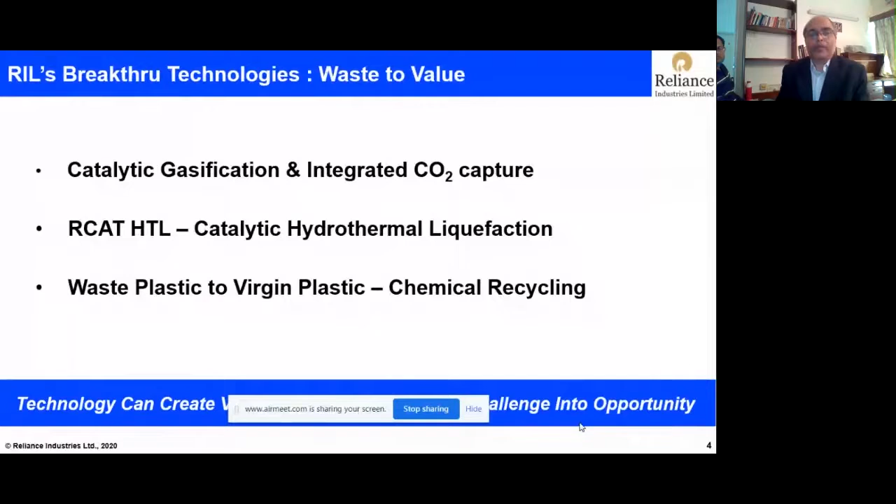Then we have a very breakthrough technology, RCAT HTL, hydrothermal liquefaction. It's basically for all kinds of biomass, but more focused on wet biomass. We also have a process for waste plastic to virgin plastic, chemical recycling. We expect it to get about 55 to 60% circularity.

When we talk of the energy sector, specific to India-centric innovation, we have to keep in mind that there are 4 circles which have overlap: availability, affordability, sustainability, and productivity. So the technology that we intend to develop encompasses all these circles.

So far, India was short in feedstock. We are importing a lot of oil and gas, which is a heavy burden on the economy. Fortunately, the world is moving towards a circular economy, and as you know, India is an agro-based country. A lot of agro biomass is available. India also has the high ash Indian coal reserves. There is also a lot of municipal solid waste, waste plastic, etc.

If we can convert this waste material into chemicals and energy, this would bring a lot of circularity and greenness to our energy sector. So that's the core thing that I am going to present to you, how our technology development would lead towards this.

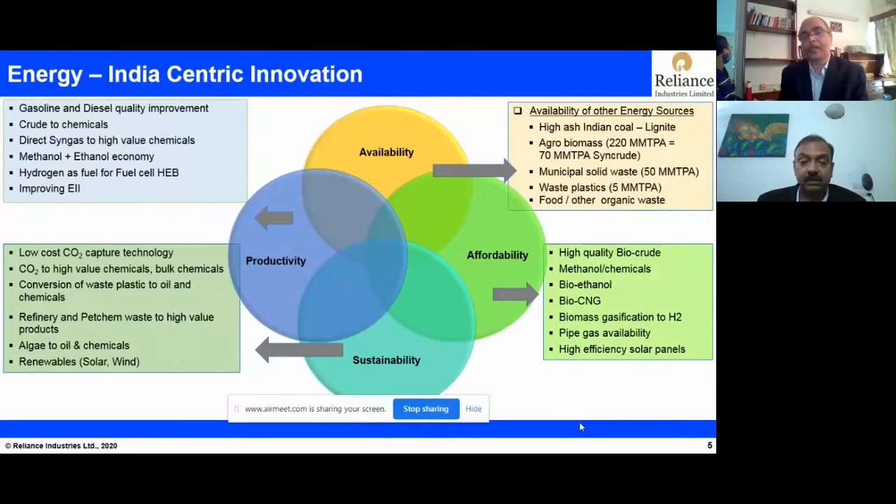On affordability, there is a lot of rural development possible if we can convert biomass into bioethanol, methanol, CNG, hydrogen. All these are green products possible from biomass. Integrated CO2 with high ash Indian coal can also lead to sustainable solutions for energy. So these are the core topics that I'm going to cover.

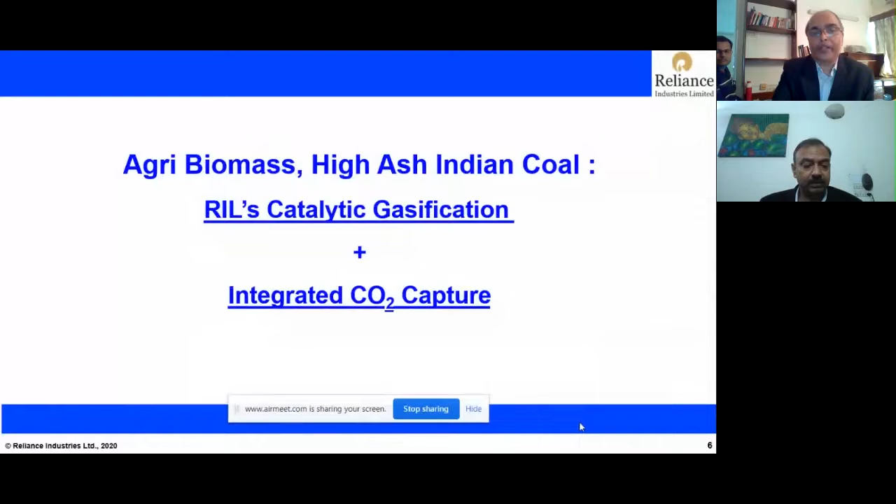Right, so agro biomass, high ash Indian coal. Let's see how Reliance Catalytic Gasification integrated with CO2 capture helps. Last year, we presented this catalytic gasification technology. We have advanced it further, incorporating biomass in a big way for producing syngas, green hydrogen, and utilizing that to produce biomethanol and bioethanol.

As you know, catalytic gasification is a breakthrough technology. It has a solid catalyst circulating in two fluidized beds. It's gasification without any oxygen, so it's steam gasification. On the right side you will see that, and on the left side the catalyst circulates to another vessel which is the combustor. It operates at about 750 degrees, so the temperature is much less. It's a low temperature catalytic gasification, which allows no oxygen requirement, because the air is burning in the combustor, and there is no oxygen or air given in the gasifier.

So what are the benefits? Low temperature operation works for 3 to 4 years on stream factor, which no other gasification technology can provide. It is much similar to the FCC platform in refineries, having two vessels. So there are lots of advantages.

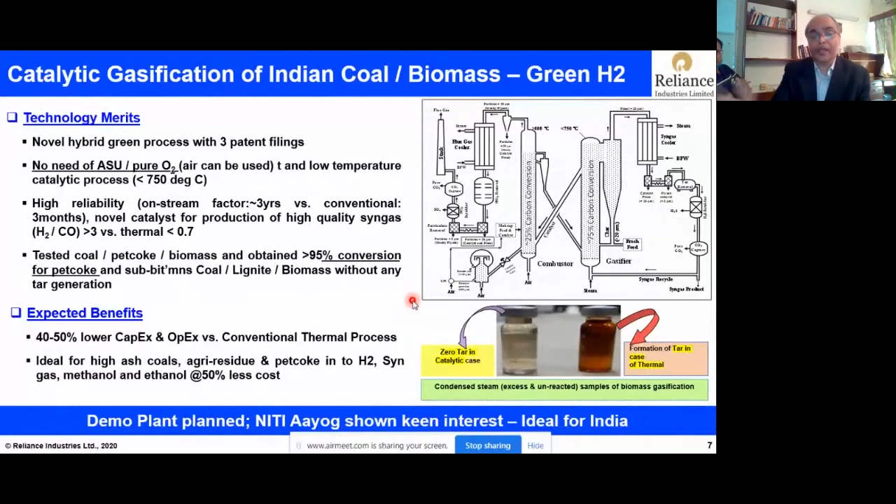We have presented this case to Niti Aayog. This can handle high ash Indian coal in a very efficient manner, so Niti Aayog has shown keen interest in taking part in the demonstration and commercialization. We are going ahead for demonstrating this technology at suitable scale so that we can move forward for commercialization to convert biomass into green hydrogen and lots of other syngas based products.

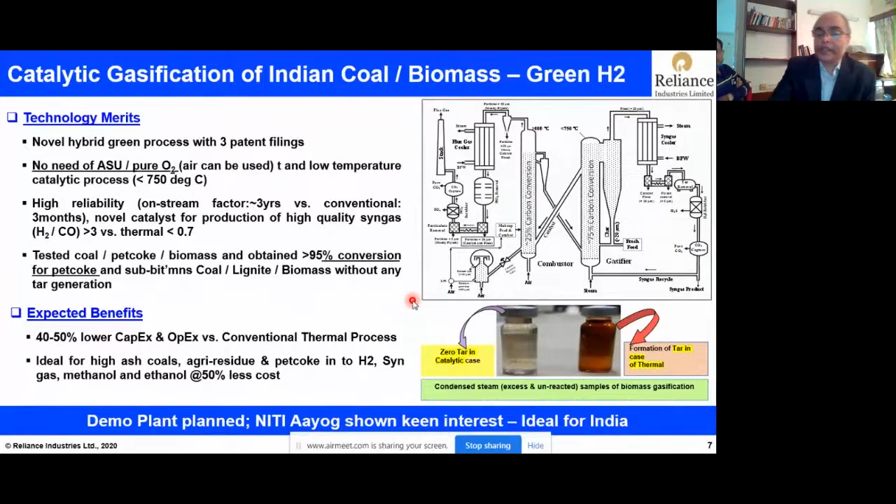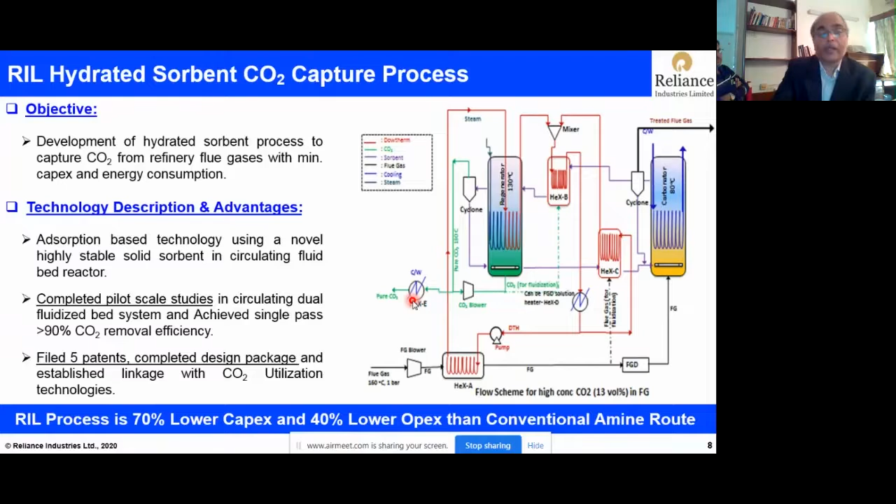We also have a CO2 capture technology. This is again a solid sorbent based, low temperature process, and unlike the amine based process, the advantage here is it has 70% lower capex and 40% lower opex. So overall, we get about 60-70% reduction in the cost. It's less than $20 per ton of CO2 capture, which is very unique. This can be integrated to the gasification.

Let's look at the economics. If we adopt catalytic gasification and apply it for high ash Indian coal, it is possible to produce SNG at less than $3 gas cost, which is almost like shale gas. You get an advantage of about $3 to $4 gas cost reduction on the syngas. That's very significant. How does it happen?

You get almost like 15 unit increase in cold gas efficiency. It's a low temperature process. The calorific value of the syngas is roughly about 600-700 kilocal higher than what you get in the thermal high temperature entrained bed processes. And because it is low temperature, you get very effective utilization of the heat, and loss of sensible heat is also much less.

The benefits are even higher when you deal with methanol, because of the advantage of hydrogen to CO ratio on the higher side. We can significantly utilize the CO, hydrogen and CO amicably to produce methanol. You can see here the methanol production from entrained bed normal gasifier is 0.6 ton per ton of high ash Indian coal, whereas here we get about 0.9 ton, which is significantly higher.

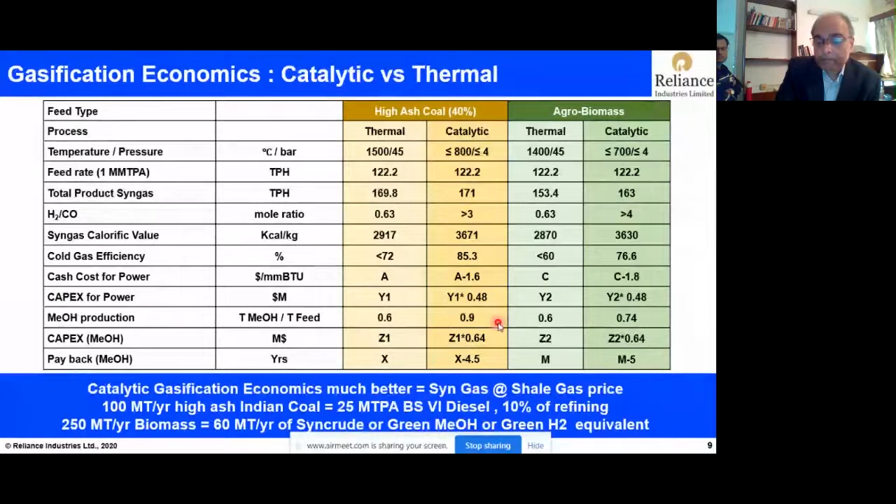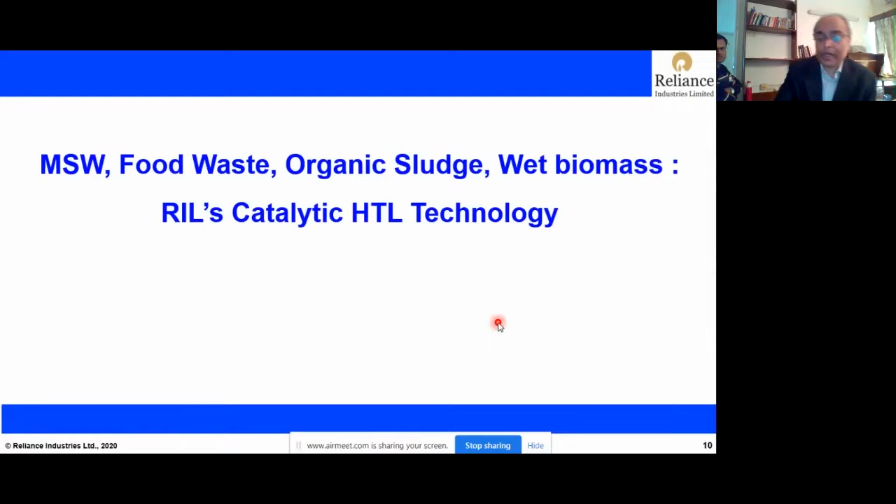I shall speak to you now about the HTL, Reliance Hydrothermal Liquefaction Technology, which is again a catalytic process, and it's more oriented for wet biomass like MSW, food waste, organic sludge, etc. But it can also handle dry biomass if it is made in slurry form. It's a high pressure, about 150 bar pressure, but moderate temperature and without hydrogen process. No hydrogen is used in this process.

So it's a catalytic pyrolysis process in which the slurry form of the feed is used, and the biomass is converted into pyrolyzed product. But because of high pressure and near supercritical condition of water, we get a very good stable product. Actually, the liquid product has very less quantity of oxygen, so deoxygenation reaction is very high. The yields are much higher, and the biocrude thus produced can be brought to refinery, and we can convert that very easily to a refinery compatible crude with minimum hydrotreatment and desalting possible.

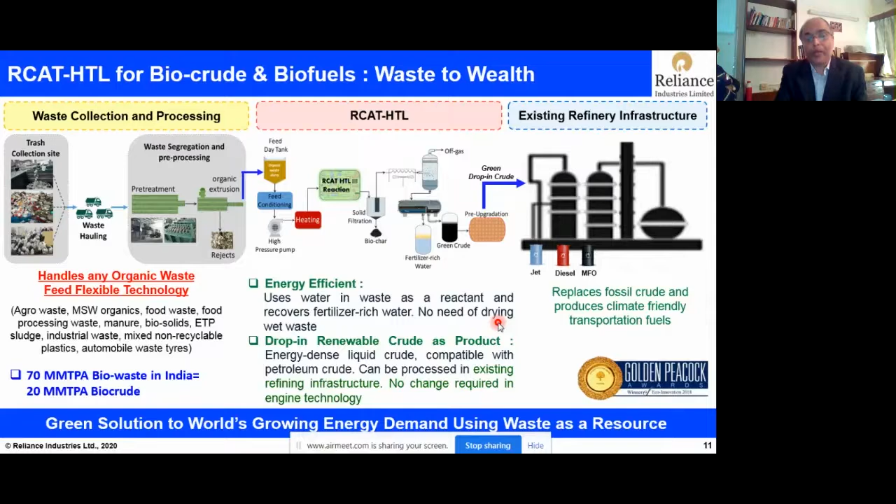So if we can convert 70 million ton bio waste from MSW and food waste, etc., it's possible to get about 20 to 25 million ton of biocrude, depending on the type of bio waste.

Now let me show you the biomass to energy. There are varieties of technologies available, and you can get different thermal efficiencies. The first one is for agro waste, agro residue, power generation. You get dry biomass to electricity by combustion, roughly about 27% thermal efficiency. Then you do 2G ethanol through fermentation route, and you get about 34% thermal efficiency.

Hydrocatalytic pyrolysis to gasoline, diesel, and kero gives you an efficiency of about 56%. If you do anaerobic digestion, which is used for biogas, just the biogas part gives thermal efficiency of 48%, but once you produce power out of it, you get roughly only 18 to 20%, because the carbon conversion in anaerobic digestion is not very good.

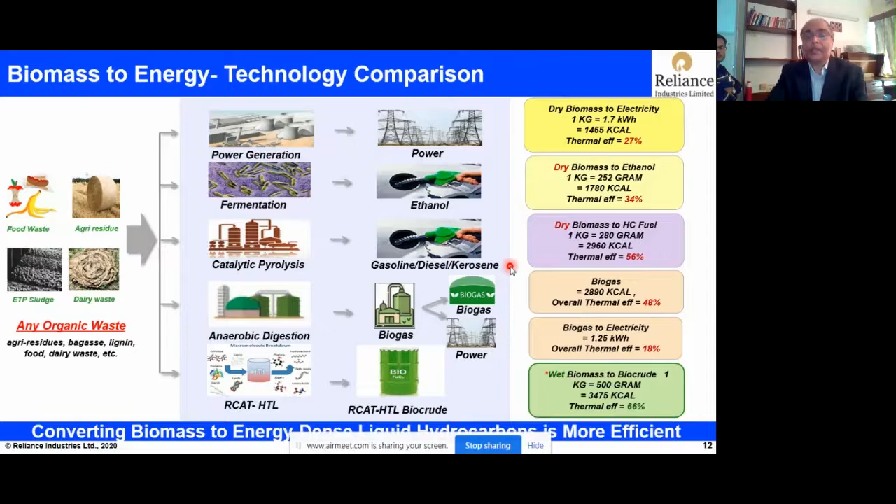Now, compared to all these, the RCAT HTL, you get a biocrude from this process with roughly about 66% thermal efficiency, which is much higher compared to any other wet biomass based processes.

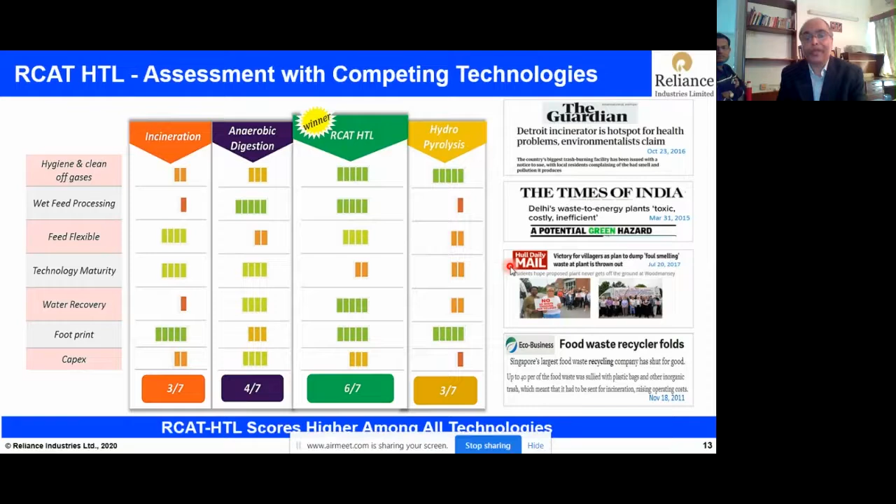If you look at the hygiene and clean off gas, wet feed processing, feed flexibility, technology maturity, water recovery, footprint of CO2 and capex, in all these, RCAT HTL clearly appears to be a winner. In most cases this is on the positive side, and this technology has been evaluated in the world arena, and many large companies have shown very deep interest because of the inherent advantages.

Now let's talk about biomass. You have several technologies available to produce all kinds of different products. You have biogas anaerobic digestion, then 2G bioethanol, then 3G bioethanol. What we are talking about in 3G is basically catalytic gasification combined with gas fermentation. This could even be higher than 3G actually, because it is more efficient than 3G based on algae route in terms of economics. Then there's the RCAT HTL for biocrude.

Here are some very rough cut, ballpark comparisons I would put it. As you know, with biogas, almost 80% residue is left over. You get about 13-14% biogas. With 2G bioethanol, the main product yield I'm talking about is 19 to 20% bioethanol. Now look at 3G bioethanol, you almost get, per ton of biomass, about 45% as bioethanol in the 3G route. And if you take wet MSW based on the dry basis, essentially per ton of dry basis feed, you get about

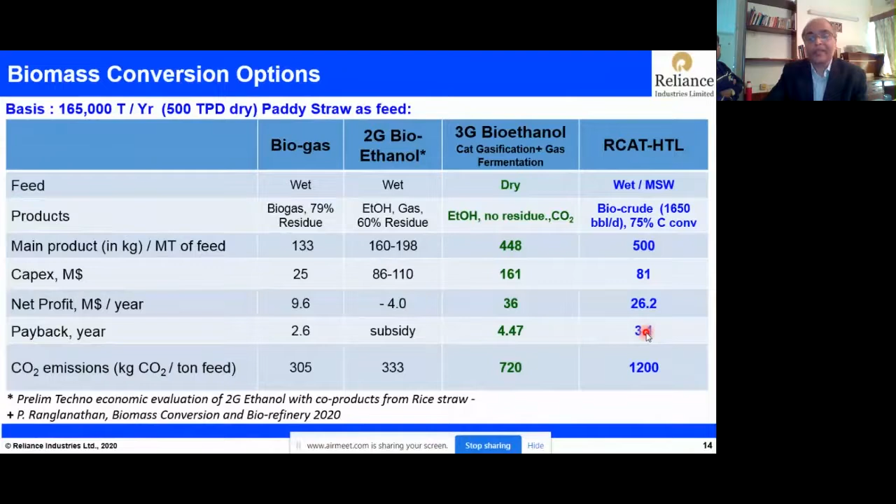So let's talk about waste plastic to virgin plastic, circular economy.

Plastic, waste plastic is a problem, and the current technologies of thermal pyrolysis also have problems. That is why the waste plastic issue is not resolved. Thermal pyrolysis technologies have already been practiced at small scale for several years, but the technology is not trouble-free. Thermal pyrolysis has problems of pre-processing of feedstock required, segregation of feed needed, and issues with processing as-received plastic. It yields high viscosity and hot slurry pumping is sometimes required. Inside the reactor, because of low depolymerization reaction kinetics, it ends up in sticky char and tar formation inside the reactor, which leads to heat transfer problems because these are rotary reactors in most cases.

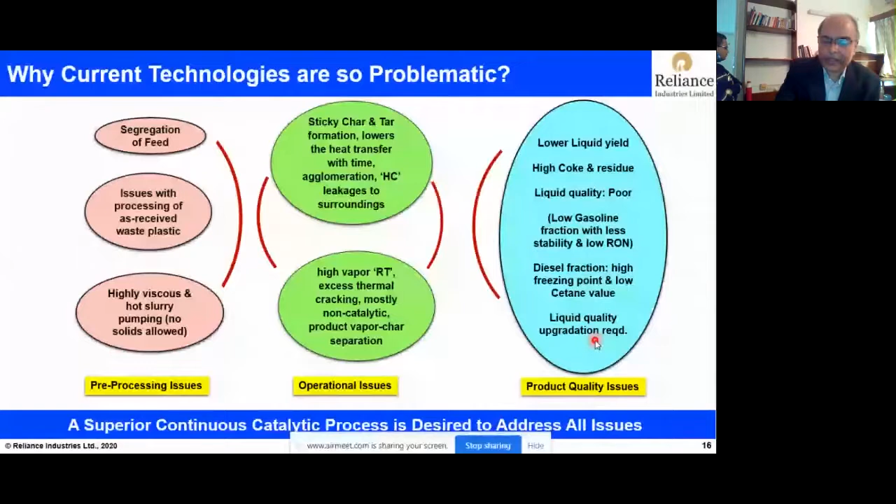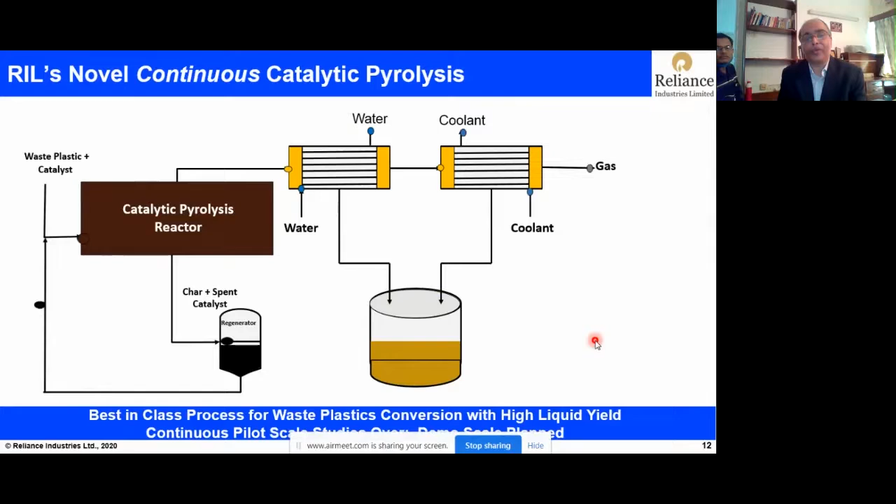We are talking here about the Reliance catalytic pyrolysis technology, which is again based on a rotary reactor, but here we add catalyst. If at a site there are a number of catalytic pyrolysis reactors, we can design plants up to 20, 25, even up to 50 tons per day based on these rotary reactors. If there are a number of plants, it's possible to regenerate the catalyst. This catalyst is very cheap, it can be regenerated without trouble and recycled back if the catalyst requirement at a site is high. What do you get compared to thermal pyrolysis? You get about 60 to 100 degrees lower temperature.

You get about a minimum 10% improvement in the yield, with liquid yield as high as 80% of the waste plastic. You don't need to segregate the plastic. It can be fed even with soil, etc.

It can be fed because it has a very good way of removing the char without disturbing the reactor. It runs in negative pressure, unlike many thermal pyrolyzers which run in positive pressure, which is unsafe due to hydrocarbon leak to atmosphere. This reactor operates in negative pressure, with a very good balance to get out the gas without ingressing oxygen inside it.

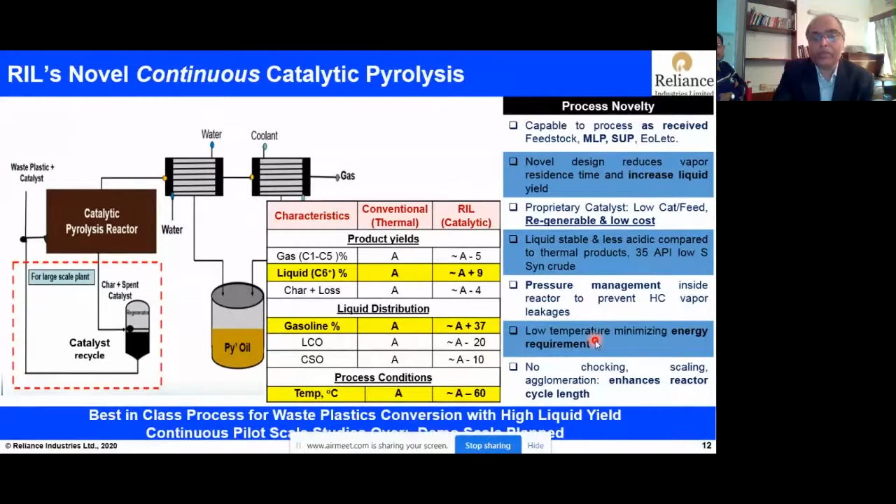The gaskets are designed in that manner, so it operates over 100 degrees lower temperature, and you get about 80% liquid yield. Because it is catalytic, the product looks like FCC product, common to refinery. It's much more stable than thermal products, and can be brought back to refinery and connected with refinery FCC streams, coker streams for further upgradation. But most importantly, we plan to produce chemicals out of these fuels.

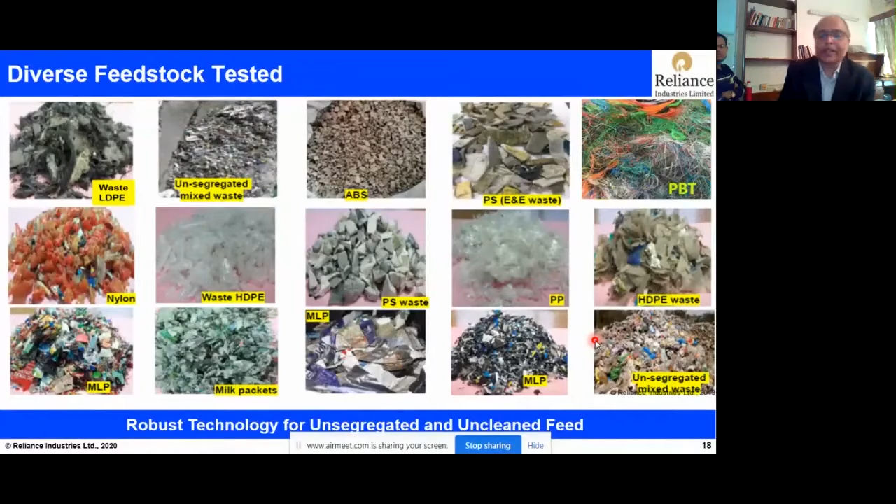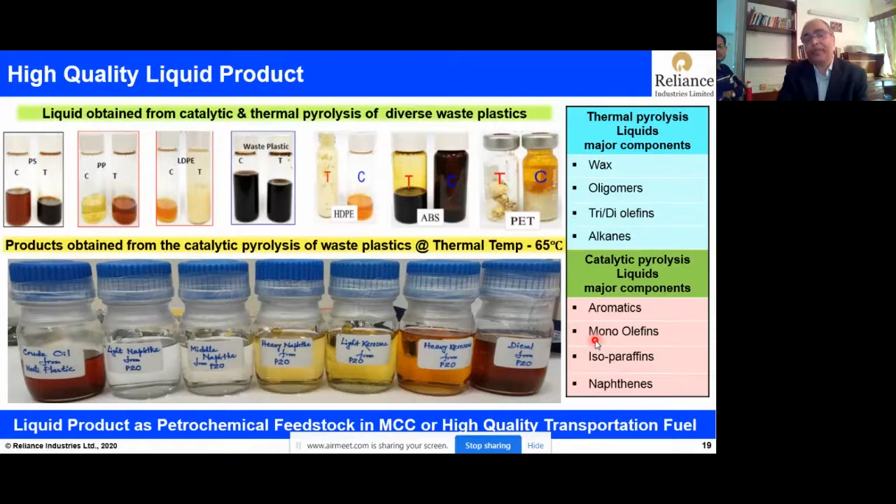We have processed all kinds of segregated, unsegregated, mixed plastic, multi-layer plastics, all kinds of waste plastic in this route. This is a patented technology, so you get a differentiated liquid yield, much higher, and it looks like a catalytically cracked product, having higher olefins but much less diolefins, much better stability compared to thermal products.

Now the stable product catalytically produced from waste plastic, we plan to bring it to refinery and process in this breakthrough oil to chemical technology which Reliance has developed, and it is under implementation. We are designing a bigger scale unit inside the refinery. This is a patented multi-zone cat cracking technology in which multiple feeds can be processed simultaneously in the same single riser in multiple zones. Look at the yields this process gives.

Out of crude, you can directly process crude or refinery streams, or the crude produced from biomass, or the crude produced from waste plastic. You can inject it in one of the zones, and the naphtha produced is recycled back in a different zone. So thereby what you finally get is practically no fuel.

You get ethylene about 24-25% of your feed, propylene about 30 to 35%, and BTX about 15%, practically very little fuel, or I would say no fuel. You get aromatics, you get olefins, ethylene and propylene, and this can again produce plastic out of it.

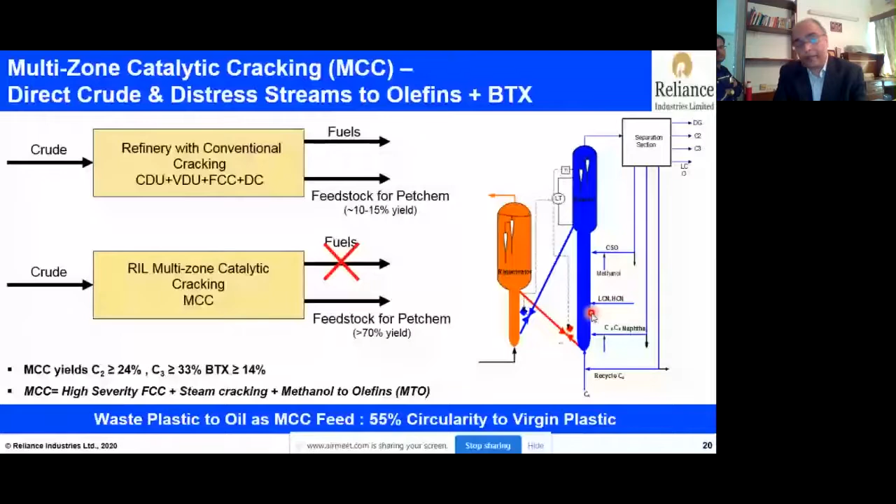So overall, what we have seen is you get roughly waste plastic to virgin plastic. You can essentially get 55% circularity by combining the Reliance catalytic pyrolysis along with multi-zone cat cracking. So in summary, these are some brand new technologies, and Reliance is active on commercializing them at different demo scale and next commercialization scale.

So thank you very much.

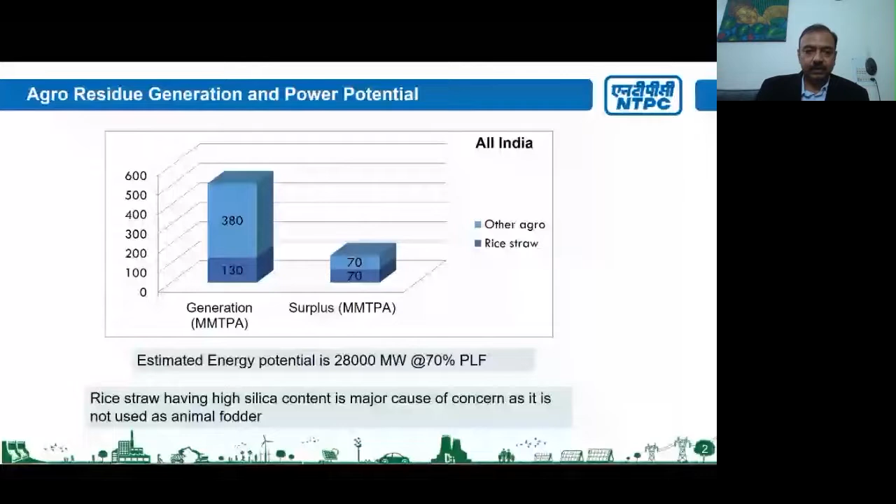The Punjab and Haryana figures are that around 25 million tons of rice straw is generated there, and it has good energy potential. So what we are doing is exploring to use it in power plants along with coal, and how we can replace coal with this kind of fuel. That is the major strategy for us.

We are doing it in two ways. First, we are converting it into biomass pellets, and then procuring those biomass pellets and mixing them along with coal to co-fire into our existing power plants. Up to 10% of the coal can be replaced through this method.

Another way is to torrefy this material and convert it into charcoal-like material, make pellets, and then fire along with coal or replace coal. In that case, you can even replace more coal—maybe 15-20% replacement is also possible. So these are the two ways we are going to utilize these materials in our power plants.

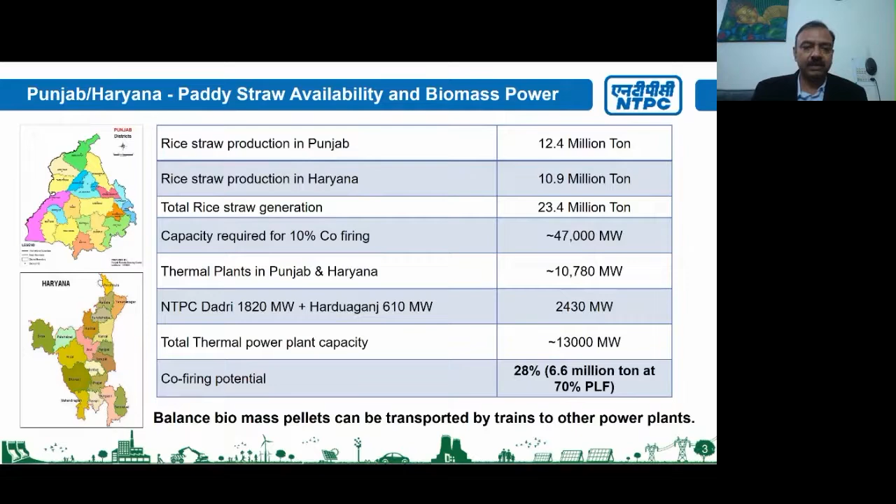NTPC experimented with these methods of co-firing in our power plants at NTPC Dadri in 2017. The Ministry of Power and other agencies came up with relevant policies to enable this kind of co-firing in all the power plants of the country. In November 2017, MOP brought a policy that up to 10% co-firing should be done in all power plants in the country.

We conducted the test firing in September, and after 2 months the ministry came up with this policy. This was basically subsequent to the initiative by NTPC and the confidence the ministry got because of NTPC's experiment. Then the 2019 CERC regulation also enabled passing on these costs to consumers.

Whatever additional expenses the generating companies incur will be reimbursed in the form of additional tariffs. REC benefits have also been assigned in February 2020, so now this biomass power will be counted as non-solar REC, and the non-solar REC benefits will be given to the buyers of this power.

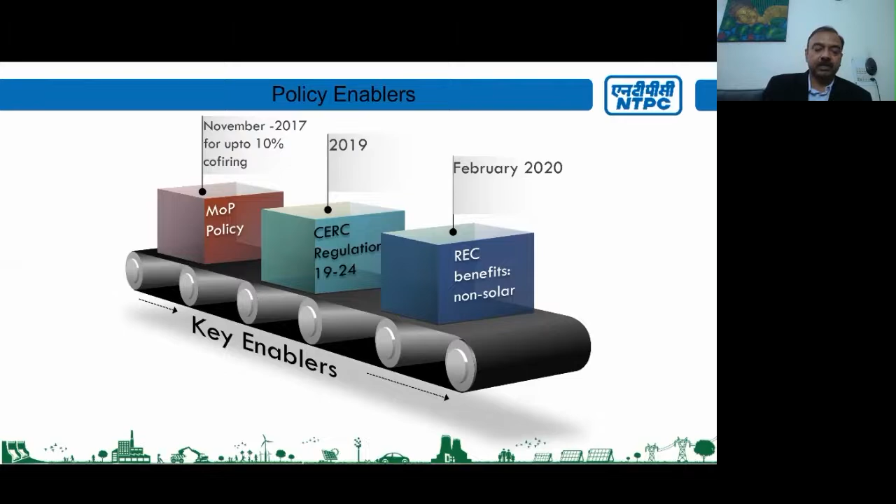So this is the action by NTPC that we have taken till now. We had ordered 14,500 tons of rice straw last year, out of which 9,400 tons we have already burnt at Dadri, and it has been able to save around 4,700 acres from farm fires by already firing this much material at Dadri. Further, we have also issued purchase orders for 280 tons per day quantity, which is around 1 lakh tons per year, in April.

These are against long-term tenders of 4 years, so the total quantity is 4 lakh tons, and supply is going to start from January. Then NITs were issued for 17 plants of NTPC to procure this kind of material—biomass pellets, agro residue pellets, normal pellets as well as torrefied pellets. The total quantity is 20 million metric tons, and this contract is also for 4 years, so every year the quantity is around 5 million metric tons.

The bid opening date has been extended, so it is not the 30th—that was written by mistake. I think the date is 23rd of December this month. Then short-term tenders have also been issued for all 17 plants, out of which for 5 plants we have already issued the purchase orders.

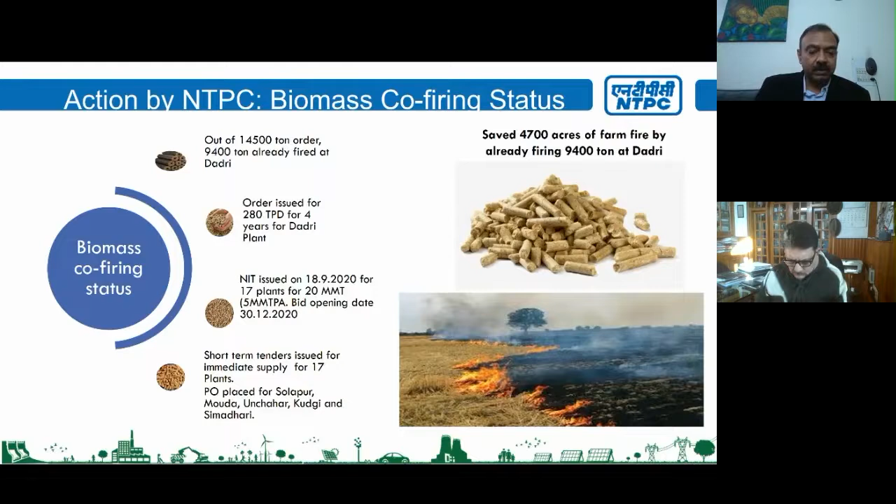So this was all about the agro waste utilization. Now let us come to the waste to energy, principally the municipal solid waste to energy.

For municipal solid waste, NTPC is installing two plants based on incineration technology using Rankine cycle converting to power. One plant is at Kawas, and the other is part of a bigger circular economy village at EDMC. Kawas already has a gas-based power station, very near to Surat city, and that plant will utilize the municipal solid waste generated from Surat city.

Only the RDF component will be given to us through the municipality. The waste supply agreement is yet to be signed there, and the bids have been opened. We hope it will be concluded very soon. Similarly, for the EDMC power block, the same kind of technology plant is being used, and there the bids have been opened and are under technical evaluation. The plant is based on 600 tons of dry combustible waste, and it will generate about 12 to 13 megawatts of electricity.

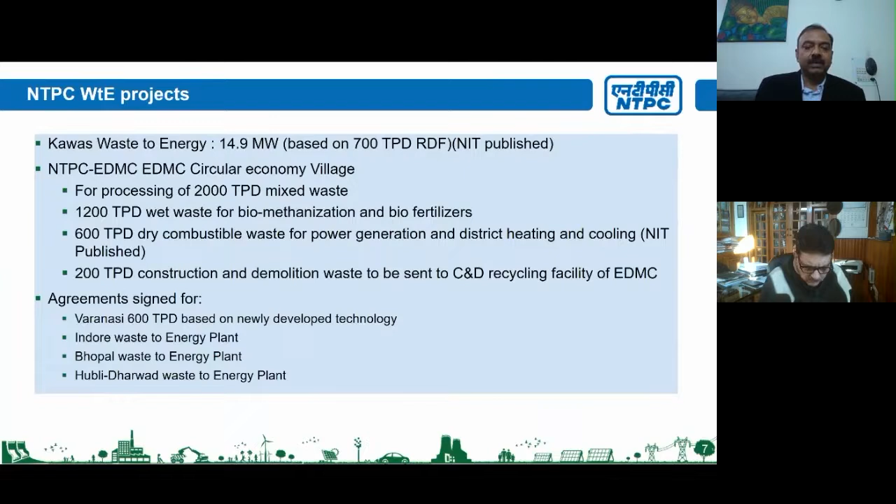Although the gas cleaning system is normally very elaborate, the efficiency depends upon the operational practices of the developer. So we may find a lot of emissions in some plants in our country where emissions are more and the local population is suffering. That is one of the issues, because there is local resistance in our country. The plant is also not maintained very properly in some places, so the local population opposes such plants because of the filthy surroundings and obnoxious smell.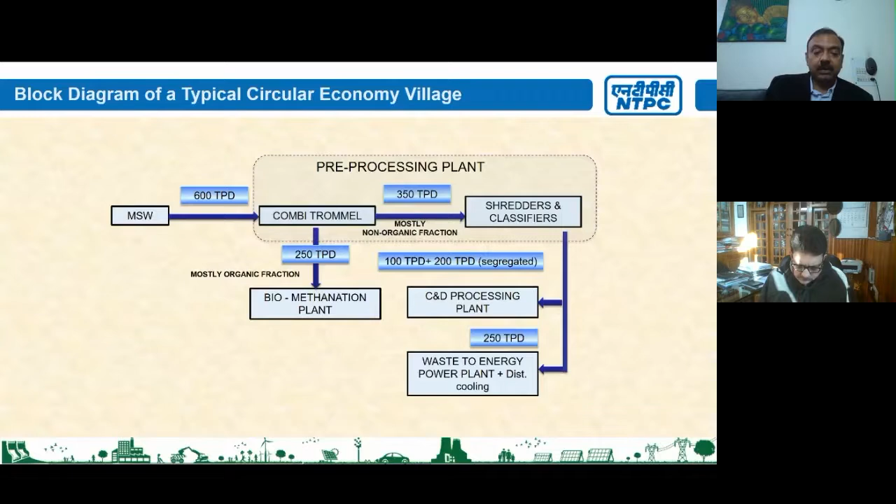So this is basically a circular economy concept where each and every part of the waste is being utilized and goes back into the economy. So it is called a circular economy concept.

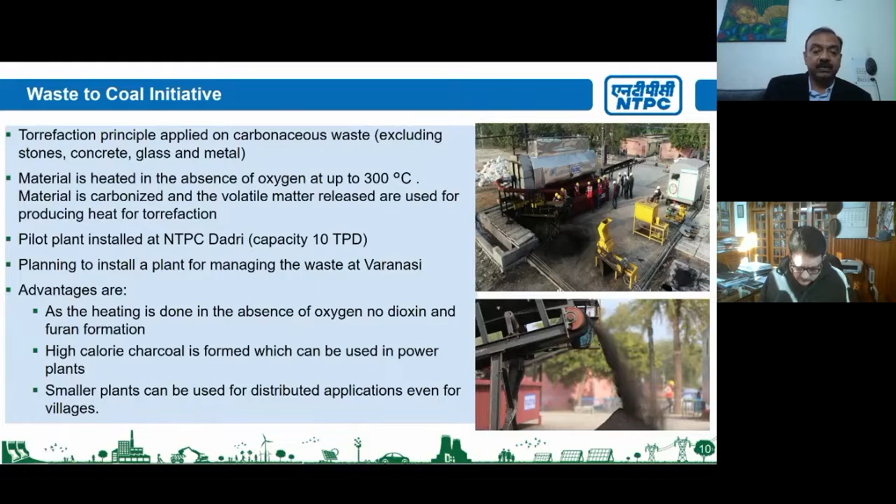Thank you. So this is all about the environmental impact of the plants and the technologies which we are exploring. So any questions?